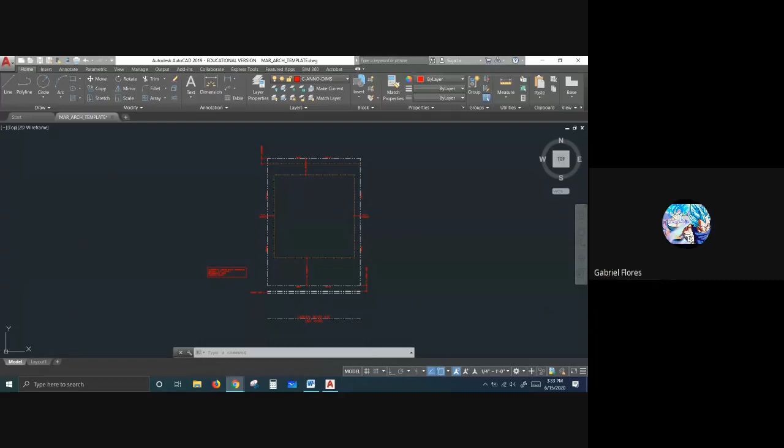Okay, so your assignment, what you were supposed to turn in yesterday, was just the site plan. Ideally it should have looked something like this. If you guys can see my screen, it should have looked something remotely to that. Obviously I'm missing my north arrow, I haven't put that in yet, but it should have something remotely close to that.

I know some of you guys were trying to put the title block already. I'll show you guys how to do that right now in a little bit.

Okay, you had a question on text sizes, that is dependent on what I'm about to show you right now. That was from my other class. Let's see. All right, that was mainly it. The other thing was scaling, where you're trying to set up your text via annotations, and it was messing with the scale. Did anyone have any questions other than that?

Did anyone have any questions on what they did, reasons why, anything? You can either say it or put it in the chat. No? Sir, is it regarding your...

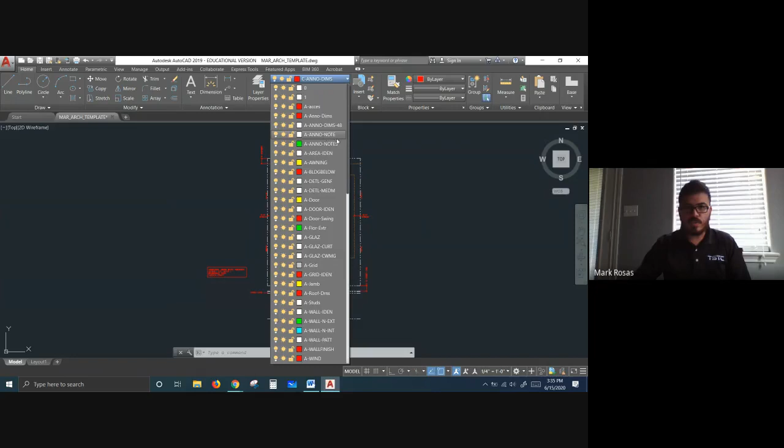When I was doing this, I used the anno dims. I do need to change my text to the actual text, I just tried keeping it to civil since it was a civil drawing. If you did it under the architectural text, that is fine as well, that's not that big of a deal. So if you used architectural anno notes, that's fine.

Yeah, I believe they're gonna just print out the same anyways, it will print out the same thickness. It's just the color that it represents on the screen.

For the assignment, also for my setback of 25, I did not edit the lines. You didn't put the lines? I did, but I did not trim it from the sides. Oh okay, so yeah, just for future, just go through and trim that out.

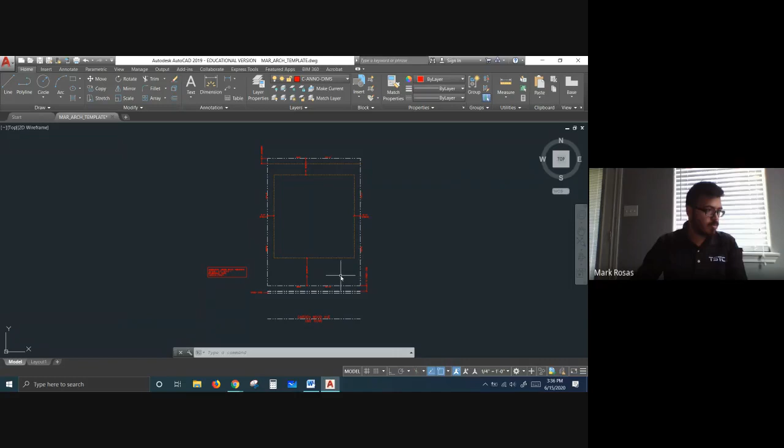Okay, that's it. All right, so the next thing, if that's all the questions, the next thing we would be going over is moving into Unit 4. So let me pull over here, Moodle, Unit 4.

Unit 4 would be actually starting our floor plan already. All right, so let me go in and pull out the PowerPoint. This is probably the most important PowerPoint in this chapter, or in this unit. And then what I'm going to do is I am going to go over...

Getting started with, well, I'm gonna go over section cuts. I'm gonna explain section cuts just so that you know, so you understand what's going on. And then I'm going to show you guys how to start drawing your house in AutoCAD.

Did you guys get the chance to start drawing in AutoCAD last semester, doing the residential, or you guys didn't get that far? We started. Yeah, we started, but we didn't get the chance to because of COVID. Yeah, we started. Our teacher was cool. She was.

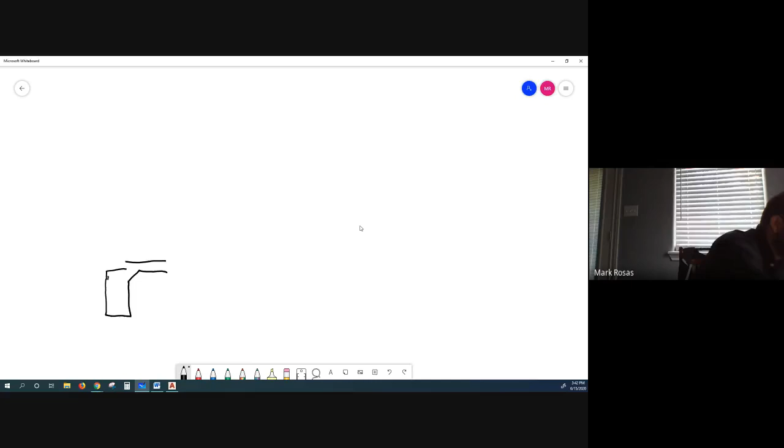So let's see - the first thing I want to cover is the exterior wall for a brick. For an exterior wall with brick, you're going to have your foundation. I'm not used to using this thing that much, so bear with me.

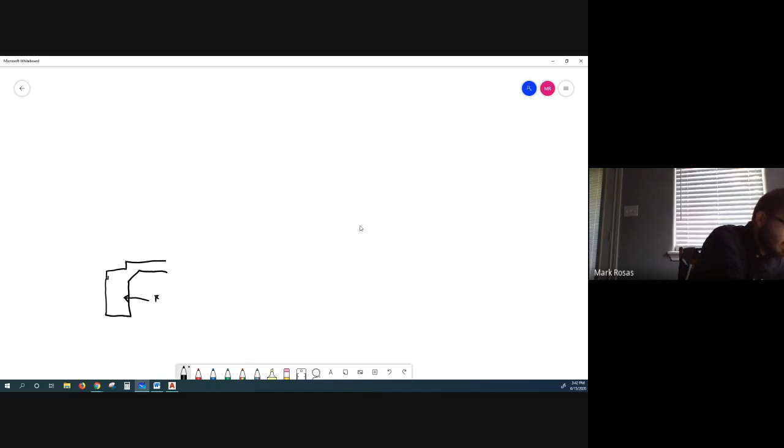So this here is going to be your foundation. I'll go over foundations in more detail when we get to the actual foundation part, but you need to know how the foundation supports the wall, so you need to see it. Whenever you start a house - if you've seen one during construction - you start with the foundation and work your way up. After the foundation has been poured...

You have your foundation and this little gap here, this little notch. This notch is going to be 1.5 inches. I'm going to pull this down with a different color so you can see it, and this is going to be 5.5 inches. Now looking at those two numbers, what does that remind you of - the 1.5 and the 5.5?

Anybody? Crickets? Is it the 2x6 and the 2x4? Yes sir, it reminds you of the 2x6. A 2x6 is actually 1.5 by 5.5.

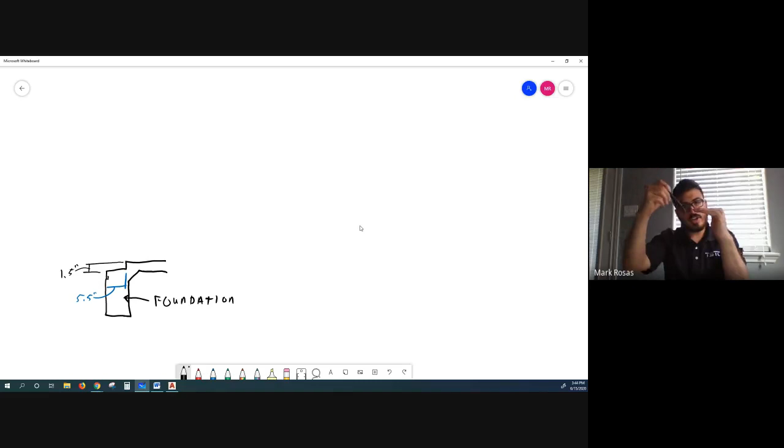So what's happening when they pour your foundation is they dig out the trenches, and at the top, when using brick, they put a 2x6 at the top, and they pour concrete in with the rebar, and it pours up and around, hopefully flush with it, so that when it's done, they knock that piece off and you have that little seat there. That seat comes into play a lot when it comes to supporting our brick, which we'll get to right now in a bit.

Now they can use a 2x4 or 2x6 depending on whatever seat they need. Brick is usually brick and CMU - you don't know what CMU is yet, we'll get into that in higher semesters with commercial work. But brick and CMU are the widest types of exterior that need to be supported.

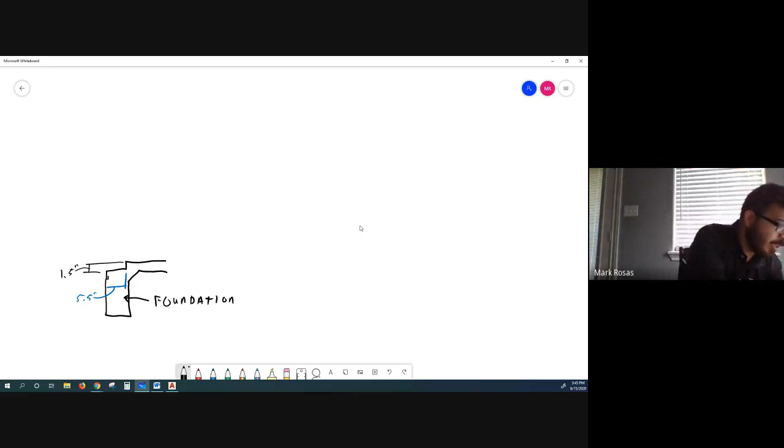Therefore you have to have a bigger brick ledge. Something like stone doesn't have that much thickness - it's fairly thin, so you don't need as big a brick ledge. In this case we're using brick for this section cut, so we have a pretty big brick ledge. Even then it's a bit skewed compared to the actual drawing because, well, it's just me and my bad handwriting. If I wanted to make it more accurate, it would be more like that. This outer dimension here is going to be 12. Let me stick to blue for my dimensions.

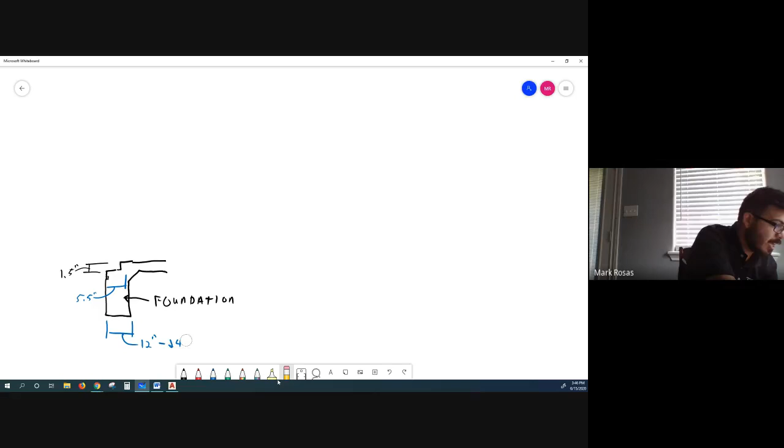This dimension is going to be typically 12 inches to 24 inches. It can be bigger, but typically it's between 12 and 24 inches. They usually try and keep it at the 6s, so 12, 18, 24. In this case, we will be using 12. But do know that they can go bigger and they can go smaller.

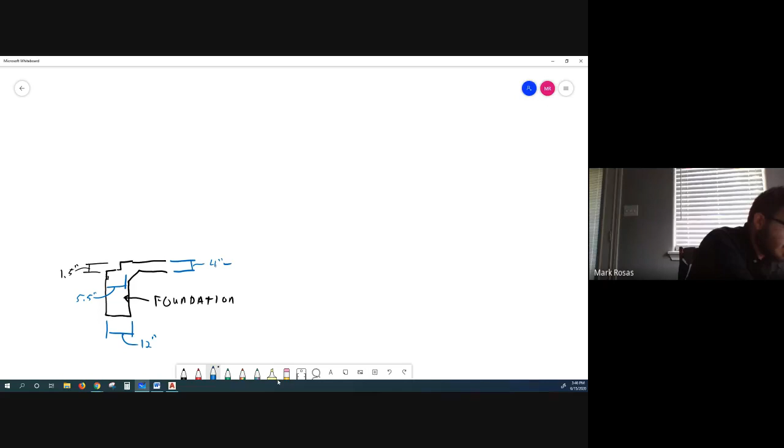This here is going to be the slab. This is the actual portion of the foundation that you put your flooring on, and that's the part you actually stand on. That can be anywhere from 4 inches to, to be honest, as thick as 8 inches, but in residential it probably never goes more than 6. So between 4 and 6 inches. And it just depends on the soil and stuff like that that you'd be building on.

So it depends on your location on Earth. Whatever type of soil, whatever type of dirt they have there, whether it's dirt, sand, a combination, clay, whatever the case may be, will dictate how thick you need to make that flooring, and also how thick you need to make this area and how thick you need to make this area. These two numbers depend heavily on your soil and how much the structure you're putting on it weighs.

So once we got that, what's the next thing that would go up after your foundation? Usually after they pour your concrete, what's the next thing that they start putting up?

So the next thing they will start putting up would be your walls, or your 2x. So what they're going to do is they're going to start with what's called a sill plate.

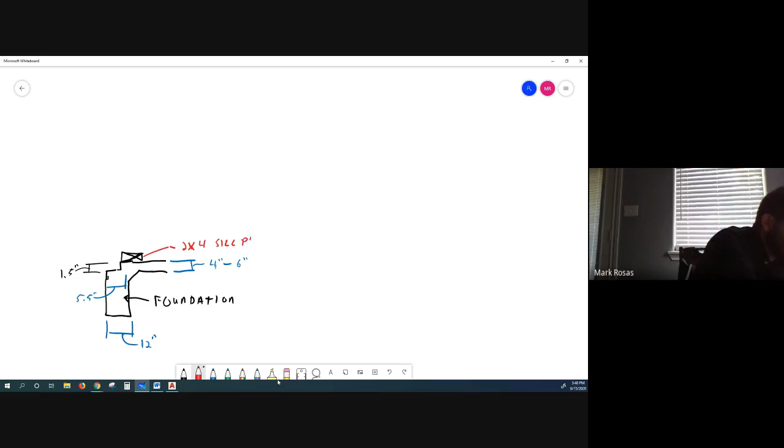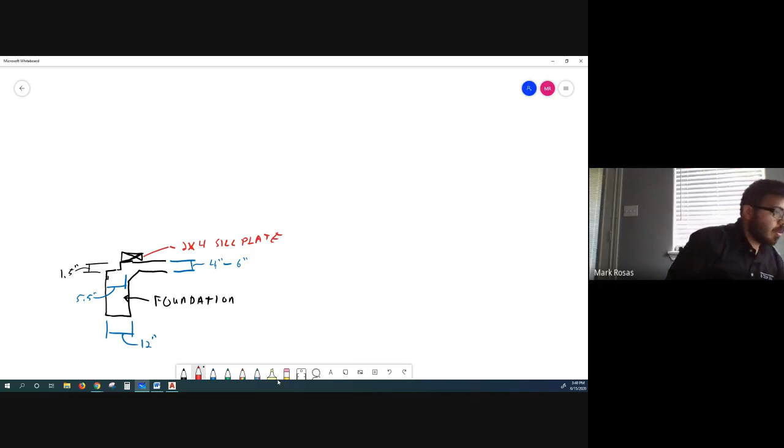This sill plate here is going to be a 2x4. In this case, it's going to be a regular wall. 2x4 sill plate. It's kind of hard to write vertically on this thing. So it's a 2x4 sill plate, and that's going to be at the very base. Now this thing is being anchored down, but I'm not going to draw the anchor just to keep it kind of clear. We'll show the anchor when we actually go into the foundation side in the future. Right now, we'll just leave the 2x4 sill plate.

After the sill plate, we go up with our 2x4 stud. So here we're going to have a 2x4 wood stud. And this wood stud is going to be basically the main part of your wall. That's going to be the actual wall that you use to attach your sheetrock to, and to attach things like pictures and all that stuff. That's the wood you're looking for when you're nailing stuff to hang onto your walls. The 2x4 wood stud.

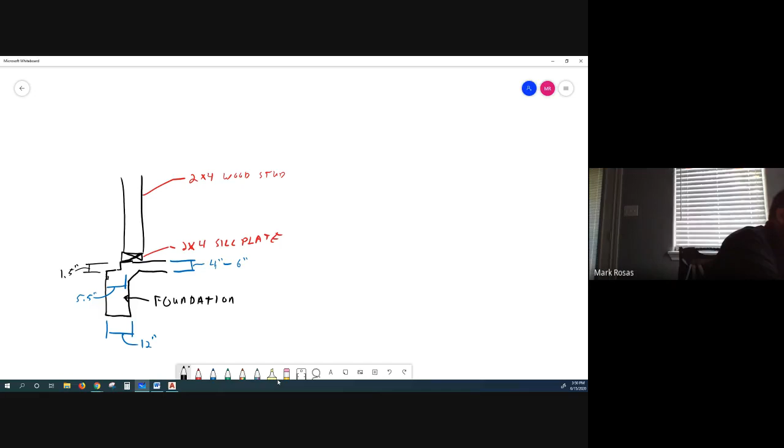So we have our 2x4 wood stud. And then every once in a while, depending on the actual room, you'll have what's known as blocking. So this were to continue up, we have a 2x4 blocking. Now what this blocking is basically doing is it's essentially acting as a horizontal support.

If you think about it, the best way to put it is: if you had a pole standing, if you had 2 poles standing, and someone came, the wind came, or someone came and pushed it this way, they're going to topple over, correct? 90% of the time, or 100% of the time, yes. So what that blocking is doing is you're putting a horizontal piece connecting them, nailing this together, so that when the wind comes to hit it, or when something comes to hit it, it's braced and they're supporting each other. So it's going to be a lot harder to knock it down. That's probably the easiest way to explain what's going on here.

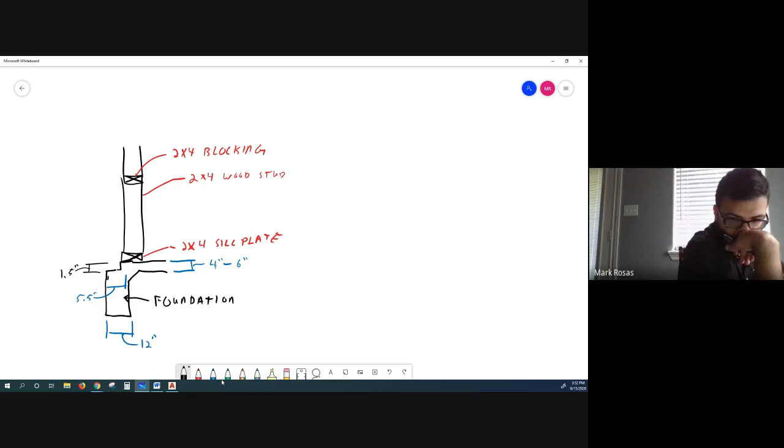So we have our sill plate, we have our 2x wood stud, we have our 2x blocking. After our blocking, we're going to have some additional things on here. Have you guys ever seen construction going on? Does anyone have any construction experience? Does anyone know what would go on after your 2x? Would we work on the outside or would we work on the inside? What would be common sense? Double.

That sounds more like a question than it does an answer. I know, I'm not so sure. I would feel like the outside because you want to be able to make sure your wood... make sure you get it right.

You guys are correct. So once they put up the 2x studs, typically what's going to happen is they're going to start working on the outside to protect the wood that they put up. They don't want it raining and messing up the wood. So what happens is they go in, put up the wood studs, and frame out the roof.

Obviously during construction they frame out the roof, then they put up the exterior. Once they finish the exterior, that's when they go inside and start putting in wiring, insulation, and sheetrock. Because imagine if you put that stuff up without doing the outside first and then it rained - it defeats the purpose. You'd have to go back and do it all over again. So it makes sense you do the outside first and then the inside.

So with that being said, we are going to have a little thin piece right here. I'm gonna point to this with the red. All right, right there - this one goes there, there, and there. So that piece is going to be a 1/2 inch continuous membrane.

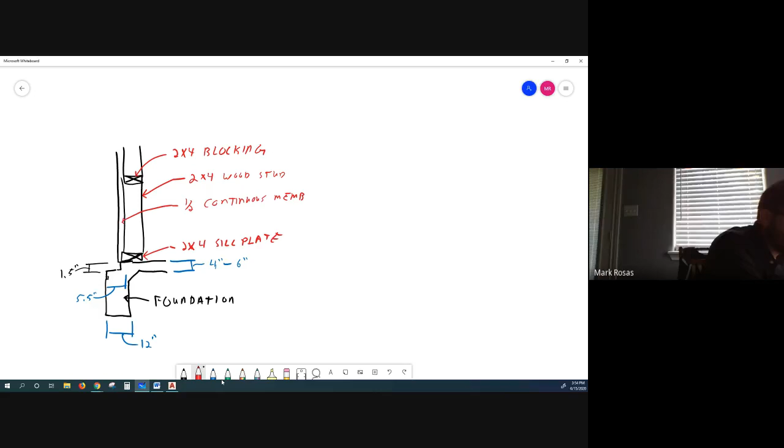Now I'm second guessing my spelling. You're good, that's right. No, yeah, I think it's right. Once again guys, not the best speller in the world - I didn't go to class to be an English teacher.

So we have a 1/2 inch continuous membrane. Now, actually, it's not a membrane - that's why I was second guessing myself. It's a 1/2 inch continuous sheathing.

So what's going on is after you've put up your wood studs, they're going to put up plywood or some type of board. Typically in these cases, it'll be a 1/2 inch plywood or a 1/4 inch or 3/8 plywood going across. Then on top of that, they're going to nail in that membrane. The 1/2 inch plywood going across is just to have a better nailing pattern for when they put that continuous membrane, and that membrane is basically a vapor barrier.

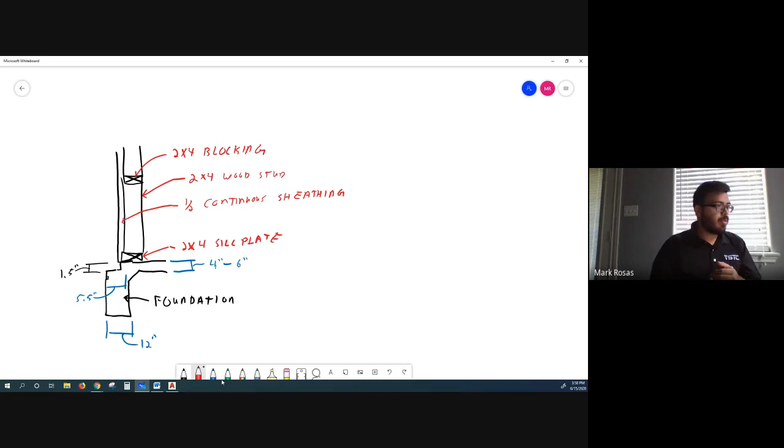Don't get me wrong, it's not a lot of water, but if you have water running down, this membrane protects the wood from absorbing the water. Because after years of absorbing that water, your wood will eventually go bad and rot. So that is why they put that membrane there.

So in reality, there would be a really thin line there, but it wouldn't be visible, so I'm just gonna try and draw over it or next to it in green. And that green there - let's see if I can point to it with the red - the thickness varies depending on the construction people. Typically, I don't put a specific size; I leave that to the construction person.

But the smallest you can probably go is going to be a 6 mil polyurethane - as you guys can see, I don't use this thing that much - a 6 mil polyurethane vapor barrier.

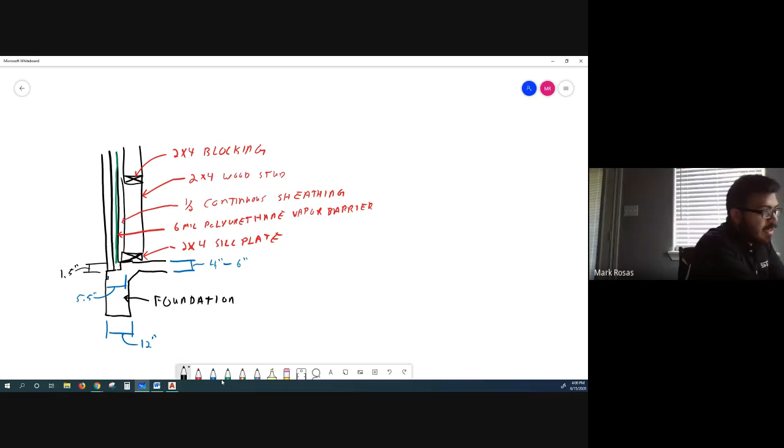This brick can be anywhere between about 2 inches to about 4 inches. It really just depends. But the overall thickness of this wall would be what distance? Can anyone figure that out?

While you guys are trying to figure that out, I'm gonna come in and put in some squigglies, and these squigglies are gonna represent my insulation. Let's go R19.

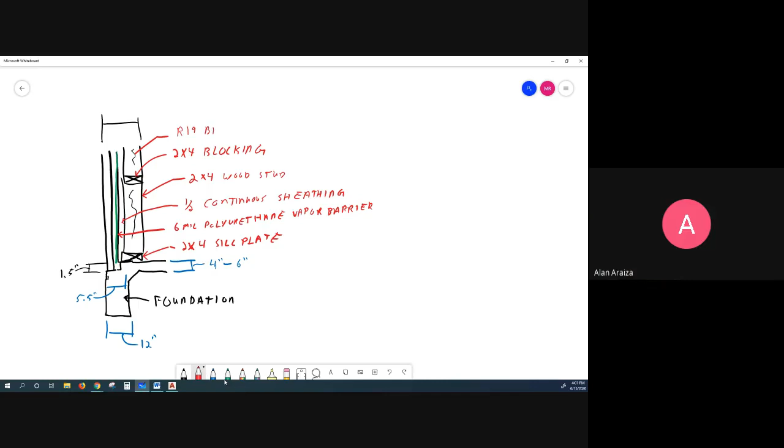So, is this wall for brick? Yes, it's for brick. So in total, it's gonna be like 8 or 9 inches. It'll be more than both.

So if you remember, you have your 5.5 inch right here. Inside this 5.5 inch, you have your brick, a half inch air gap for the water to run down. And if for whatever reason the water does fall off, it hits that membrane and this plywood that are also inside this 5.5 inch. So you have 5.5 inch plus whatever thickness of this 2x4.

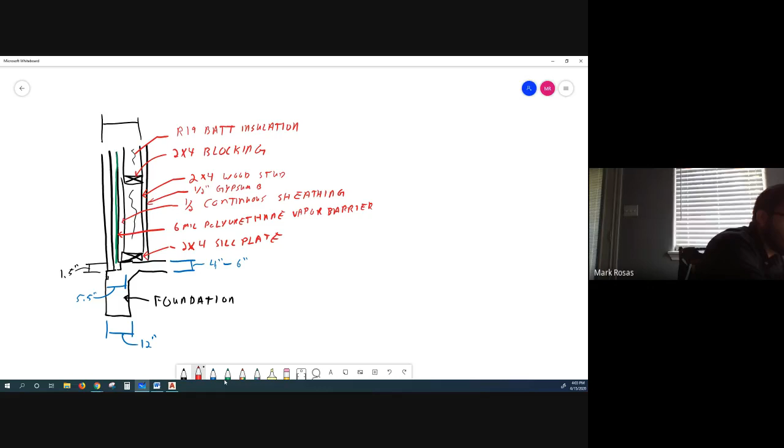So what's the thickness of my 2x4? 3.5. The thickness of this 2x4 is 3.5, yes. And then this last piece that I'm adding is going to be half inch gypsum board, otherwise known as your sheetrock.

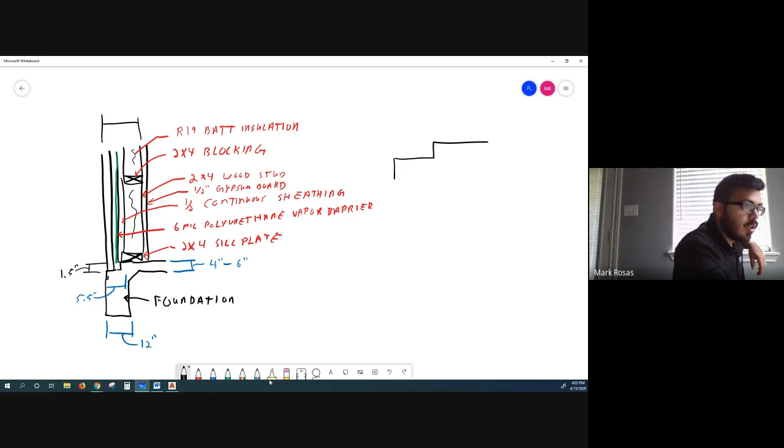So you have 5.5 plus 3.5. What's that already? So I have right here a five and a half, a 3.5, and a 0.5. What is that overall distance? It'll be 9.5.

All right. Does that make sense? Is there anybody that's lost here?

And the reason I bring this up and the reason I draw this, because the most important part is going to be this line, and that line. These 2 lines that I highlighted in yellow are going to be the most imperative parts when it comes to drawing your floor plan along the exterior.

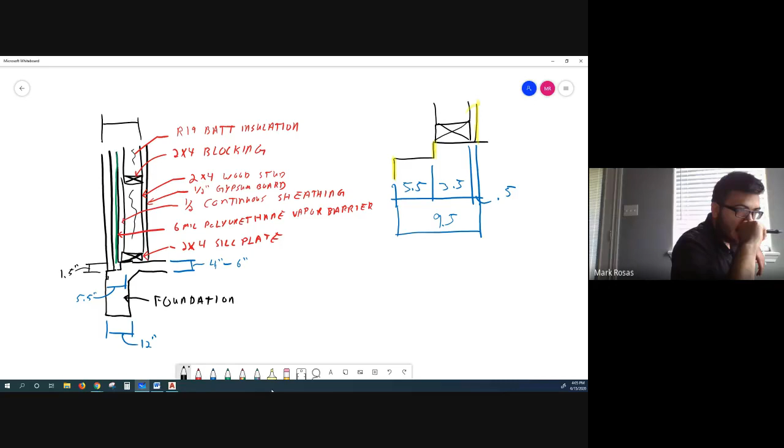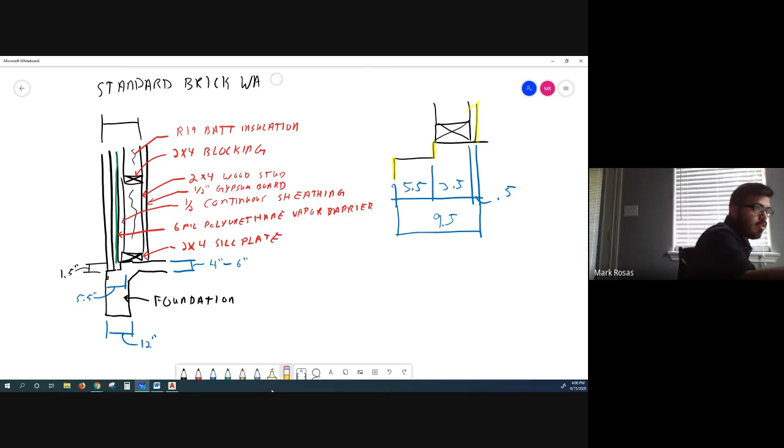Now, if a regular standard wall, this is a standard brick wall, what would my plumbing wall thickness be? It's like 6 inches. 6.5. You guys aren't listening, you guys aren't even letting me finish. What's my brick plumbing wall gonna be?

So my question to you is, if a standard brick, what's the difference? First question, what is the difference between, let's just talk regular wood. We talked about this last time. What is the difference between a plumbing wall and a standard wall? Doesn't matter if it's brick or exterior. For the plumbing wall, we use the thickness. What's the thickness for a regular wall? The thickness is 3.5, plus the sheeting.

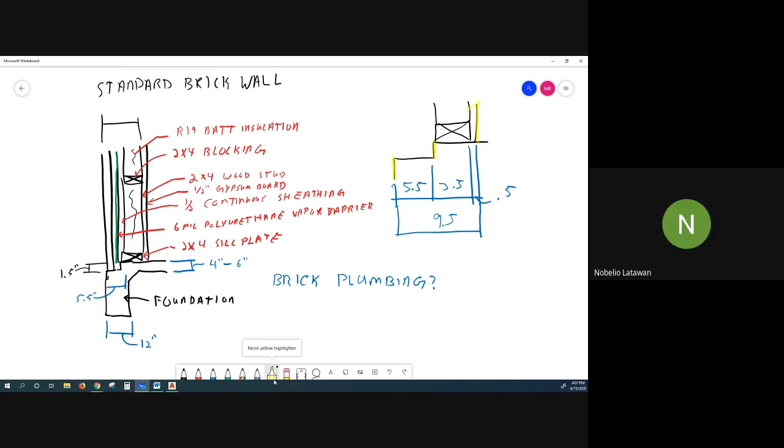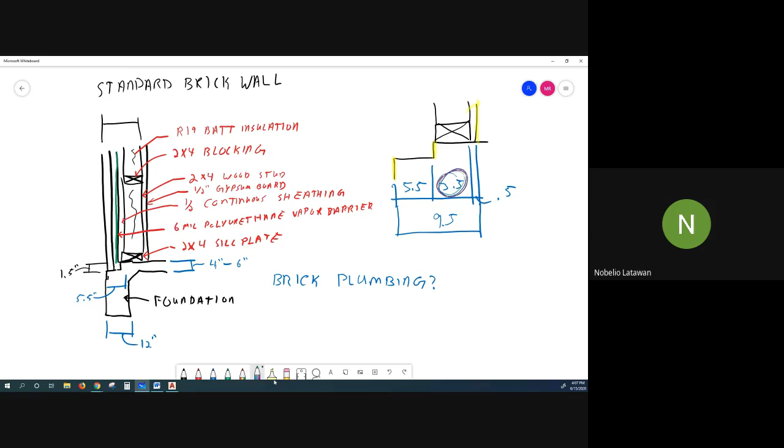Well, just talking about the stud by itself, just the regular 2x4, it's a 3.5. So the regular stud is going to be 3.5, right? What is the plumbing stud? It's 2x6, so it's 5.5.

So my question to you is, if this area here is a regular standard wall, if I wanted to make this standard wall into a plumbing wall, instead of a standard brick into a plumbing brick, what would my thickness be? And what is changing? It's 11.5.

Does anyone see where we're getting 11.5 from? Does anyone not see where we're getting 11.5 from? All we did was swap these two numbers. Instead of a 3.5, we put a 5.5. That raise in 2 inches causes this to raise 2 inches. Does that make sense? Is there anyone that does not understand? Because this is going to be very important for getting started on your floor plans. I'll take your silence as everybody understands.

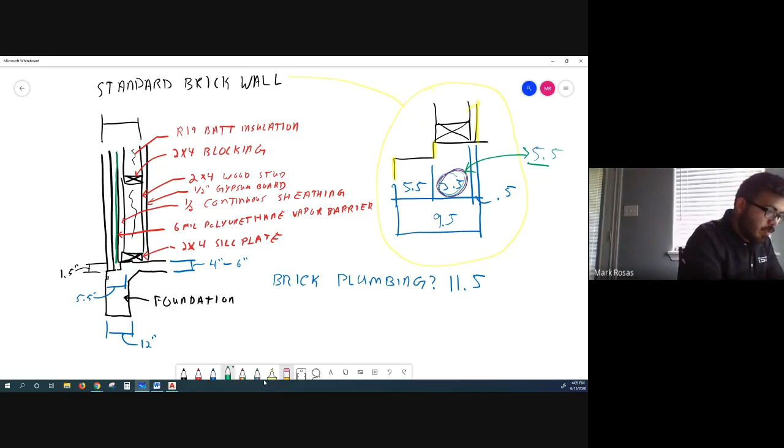I wish I had an undo button.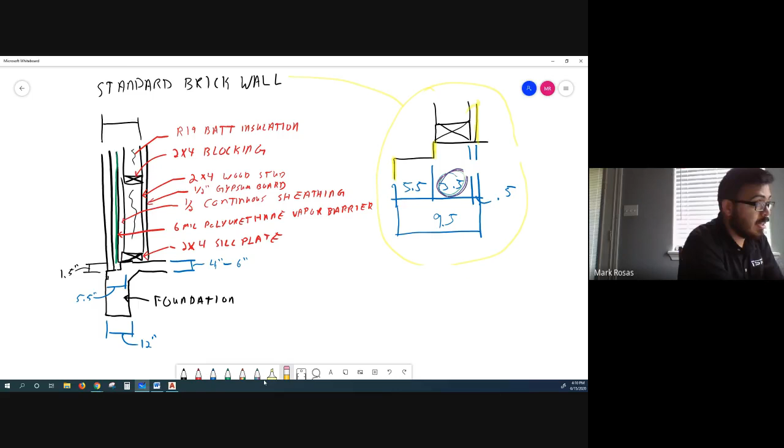If there's no questions on the standard wall, then there's no questions on the plumbing brick wall. So on the plumbing and standard brick walls, you guys are good.

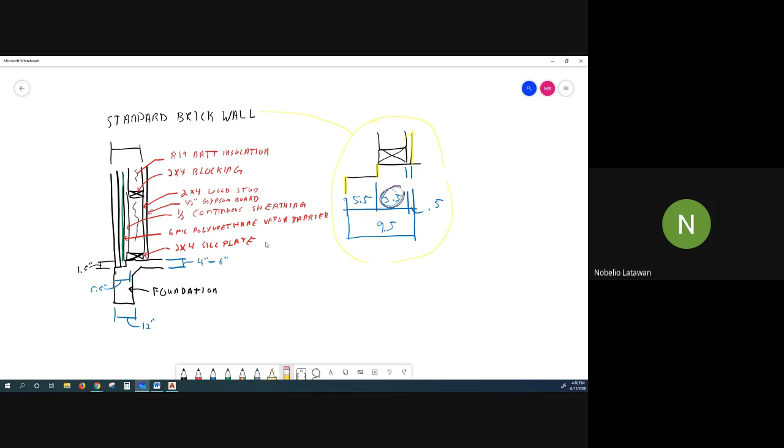So what I want to do now is... I just have a clarification regarding the plumbing. If we're going to do the siding of the bathrooms, are we going to do the whole portions of the bathrooms to be 11.5 thickness, or just the portion where the plumbing goes through? Just the portion. Well, it depends. It depends on how your wall is set up.

There's different scenarios, and we'll go over those scenarios when we get to the actual CAD part. It honestly depends, because it depends on if there's any other walls that are interacting with that wall. I'll show you what I mean when we get to the AutoCAD.

I just realized we're already running out of time, so I'm going to get one more section here. That one's going to kind of get sped up because we've already gone over the majority of this, but we'll go over that right now when we get to the AutoCAD part. Typically, you're only going to have it where you have your plumbing, wherever you have stuff like that. But like I said, it depends on how your walls are set up, and I'll show you what I mean when we get to AutoCAD. Okay?

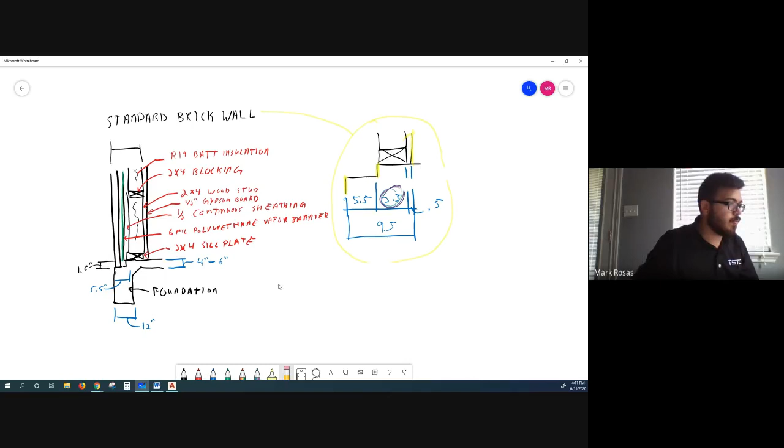Copy. All right, so now for this one, I'm going to do another foundation.

Now, if you notice, this one does not have a brick ledge. This one is going to be for both stone, glue-on stone, stucco, or siding. Will be all very similar.

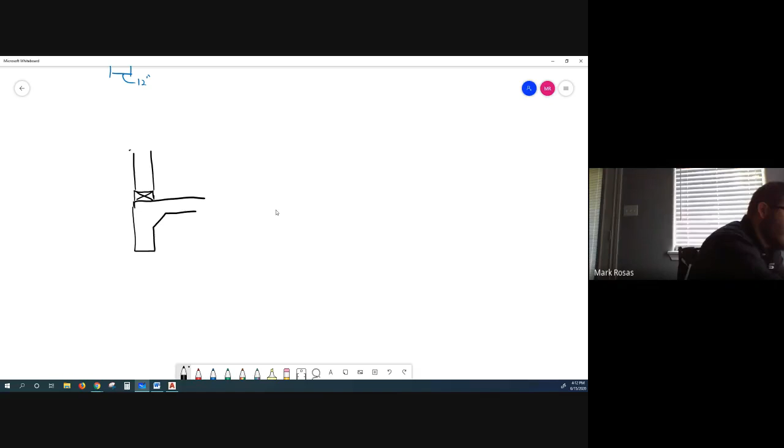So we have our foundation. Once we have our foundation, we have our sill plate. Then we have our wood stud. Once again, I'm not going to go too far into detail on this side. I'm not going to label everything because it's basically the same labeling on top. You have your sill plate, you have your stud. Now, if we're doing stucco here, we're going to have...

Oh man, can I undo that? Control Z. Oh, it does work. So we're going to have a slight overhang. Oh, what did I just do? That's cool. Either way...

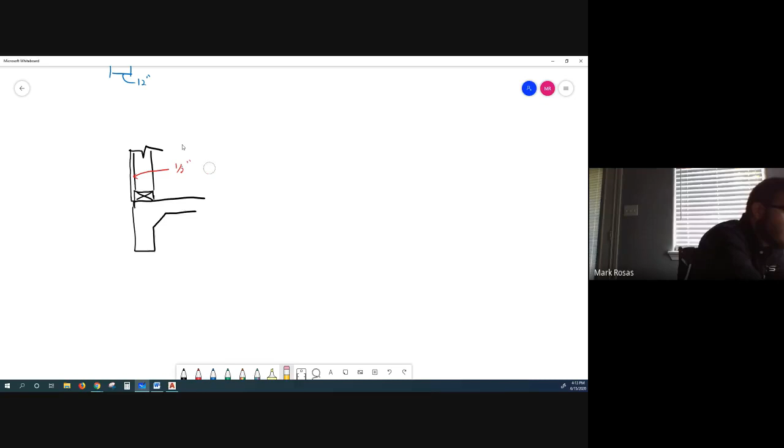This piece here is going to be a 1/2 inch continuous sheathing. So that sheathing, once again, it could be plywood, it could be hardy board, it could be whatever material the contractor wants to use. You just say, hey, it needs to be 1/2 inch thick.

And then on top of that, we're going to have, in this case, our stucco. If you notice, our stucco right here overhangs our foundation. And this stucco, we'll say, is 1 inch.

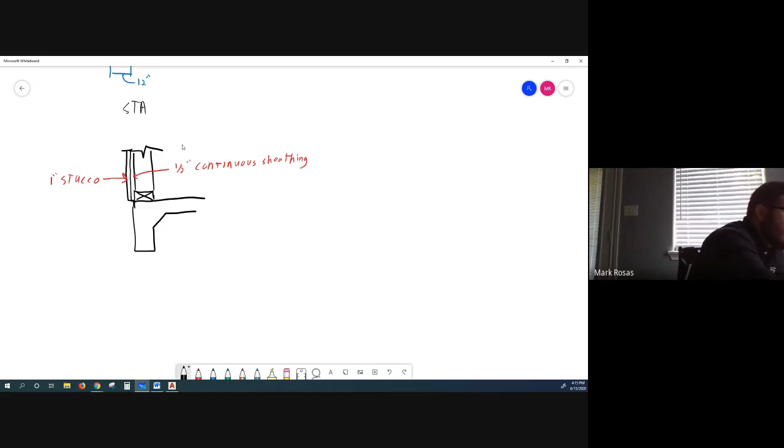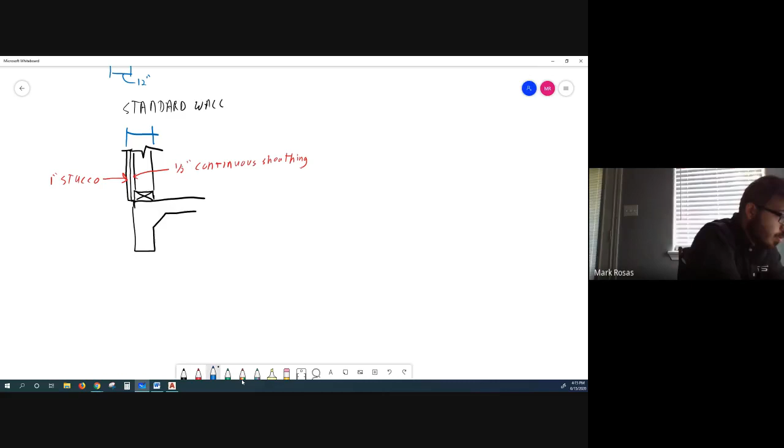So if this is a regular standard stucco wall, so this is a standard wall for stucco, what is this thickness? Looking at the numbers we have here. I forgot my...

1/2 inch plywood, my 1/2 inch gyp board. Anybody? Board. Me. 5.5. Yes, it would be 5.5. We have our 3.5 plus 1 is 4.5, half plus half is 5.5. So for a standard stucco wall, it is 5.5 inches thick.

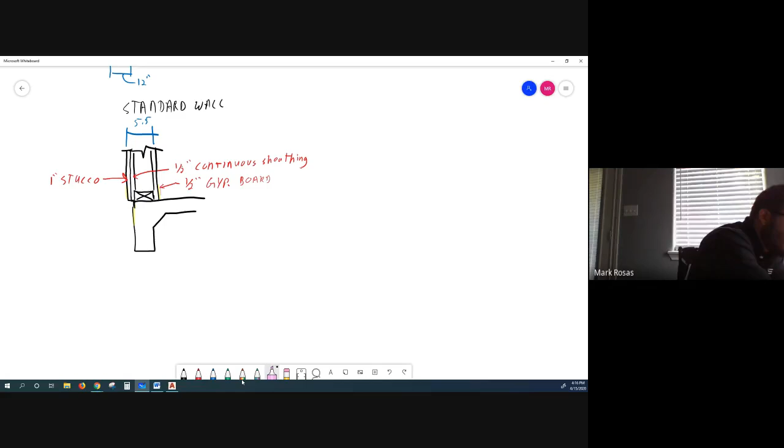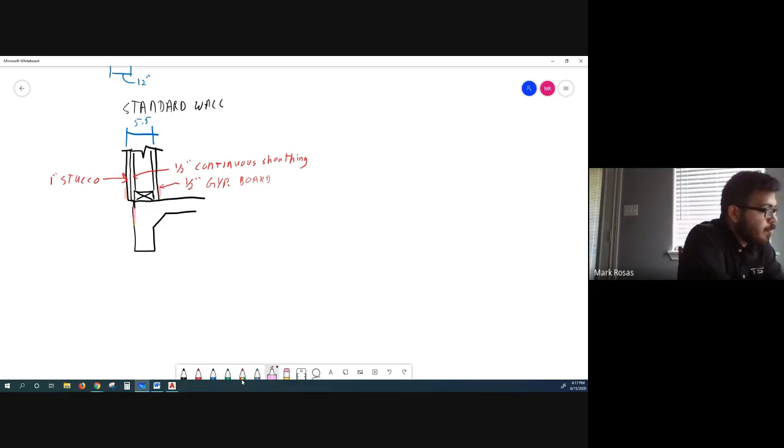And the important parts are going to be this wall, this line, and this line. Can I change this color? Yes, I can. Look at that. So this one, and this one are going to be your most important lines. You see how your most important lines shifted?

Here, it was edge of foundation, edge of ledge, and inner part of the wall. Now it's inner part of the wall, edge of foundation, and the exterior part of the wall. It depends on which type of wall you're designing, you're going to have different styles you're going to need. Does that make sense?

Yes. All right, so if a standard wall is 5.5, how much is my plumbing? My plumbing stucco, in this case, this wall here that we just drew, but for plumbing. About 7.5, it would be 7.5. Once again, just like in this one, all you're doing is adding 2 inches because you're making the wood stud 2 inches bigger. Does that make sense? Yes. All right.

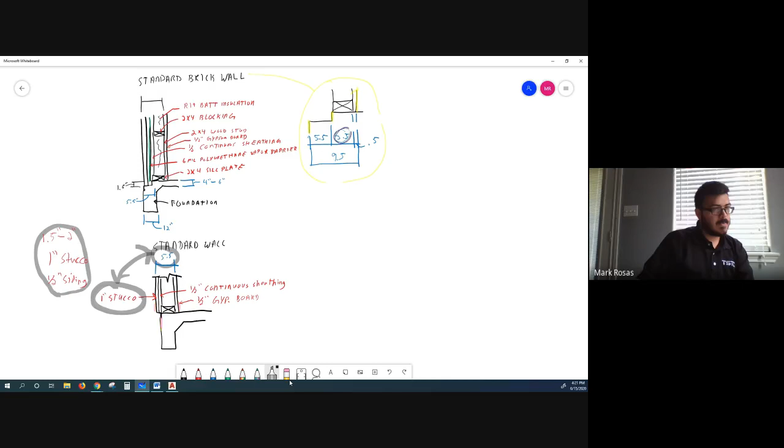All right, does that make sense? Before I move any further, before I move into the interior walls, is there anyone that does not get what we just went over? All right, I'm gonna take your silence as a yes. Hold on, okay, on the plumbing you guys said it was 7.5, right? Yes. How did you get the 7.5? Because I'm doing it myself, but I keep getting 7, not 7.5.

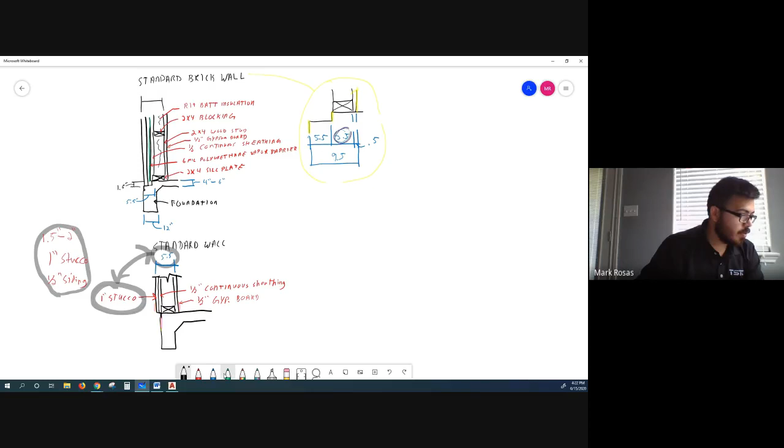Okay, so if you have this piece, we have 1 inch of stucco, right? We have 1/2 inch of the plywood or sheathing, so that's this number. We have 1/2 inch of gypboard, and then I'm gonna do this one first just to verify that number is correct. Then we have 3.5 of stud, right? We have half, that one, that one, that one.

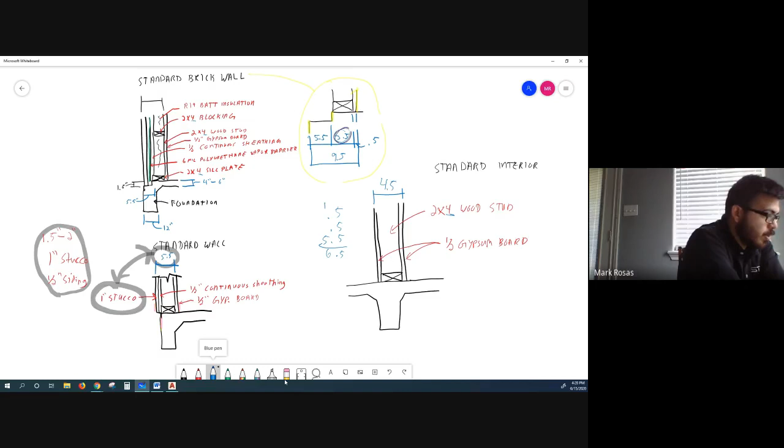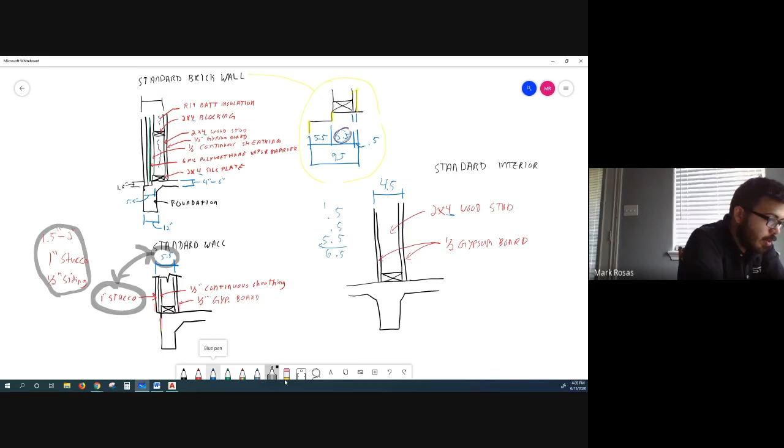All right, on these walls, the most important part to remember is going to be the actual sheet. All right, does anyone have any questions on this? I tried to break it down as simple as possible.

No? Nah, all right, yes, slowly go. Wait, do you have questions, or not? No, I don't have questions.

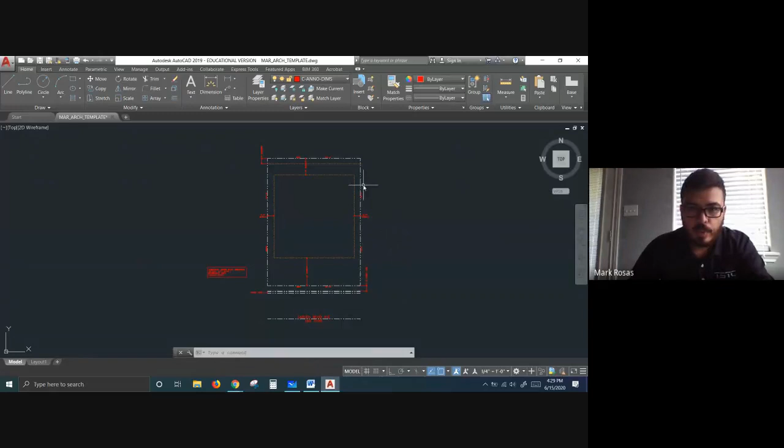Like I said last time, we have our floor plan and our site plan because we needed to know these boundaries. These boundaries limit the size, the amount of space we can use - how far side to side and how far front to back we can go. However you design your house, whether it's an L shape, U shape, C shape, J shape, K shape, square, rectangle, triangle, whatever shape you make, it doesn't matter as long as it fits inside this rectangle. Just know whatever odd shapes you make, you'll suffer the consequences when you get to your roof. Just fair warning.

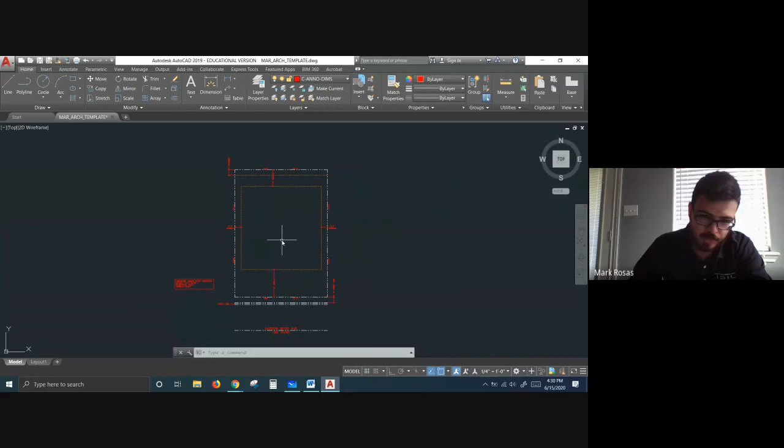With that being said, I'm going to use this as my guide to make my floor plan. First I'm going to copy this box out - it has to be drawn correctly. I'll copy it out and use this to draw my house, that way I know wherever I move this, it'll stick together. I joined it. So here I know I want to design a house, and I'm just going to start making up some sizes real quick.

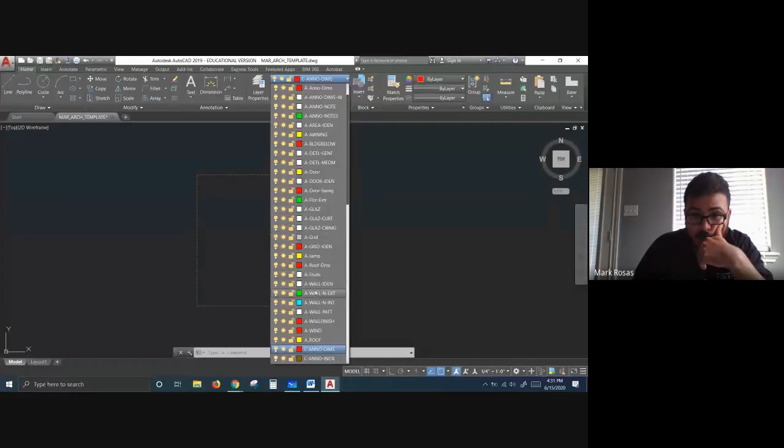Let me switch to my architectural layers so I can get started. Let's see, we have our wall exterior line. I'm going to draw a line here and here, starting from the left, from this corner, and use those two lines to make the rest of everything else. So I'm going to make the front of my house.

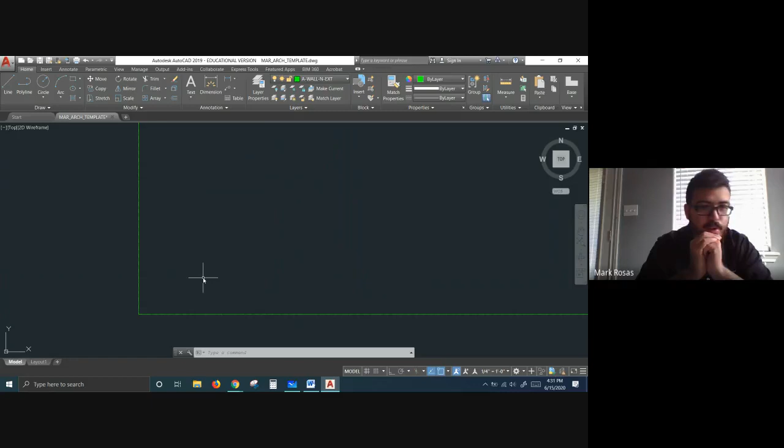Somebody give me an exterior type. Brick? All right, I'll make the front of my house brick. Never mind, cedar? You say cedar? Yeah, cedar, so wood siding. No, pine - it's a siding. Point is, it's a siding. All right, so I'm going to do a... all right, so on the sidings.

Okay, so I will do my front siding, but I'm going to start on the side, and that side will be brick - I'm choosing that side first on purpose because there's going to be some different scenarios that pop up. So I'll start with brick on my side, then do the front as siding. So I'm going to offset my brick.

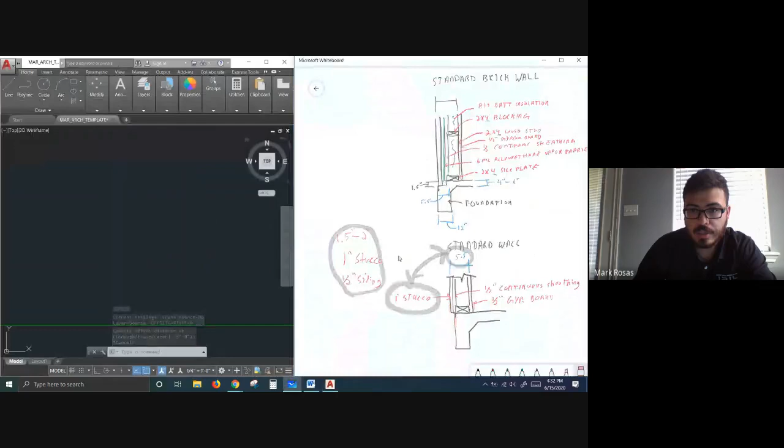Remember on that other drawing, let me see if I can pull that this way. Let's see, go here, pull in this one, do kind of a side by side. No, what am I doing? All right, this is what I want to look at right here. Give me some more space here.

All right, so if you remember, we have that 5.5. You guys are still there, right? I didn't close the window. Maybe - all right, no, the window minimized on my side, so it's like, oh, I lost them all. All right, so if you remember, these three lines highlighted in yellow are the most important lines right here.

So I'm going to start with this exterior since I'm starting on the outside. I'm going to offset 5.5 first - 5.5 inches. All right, doesn't look relatively small. And then I'm going to offset, so now I have these two lines.

From this line to this line is going to be how thick? From this yellow line to this yellow line, from this... 4, right? I'm going to offset 4. All right, so this is my exterior wall on this side.

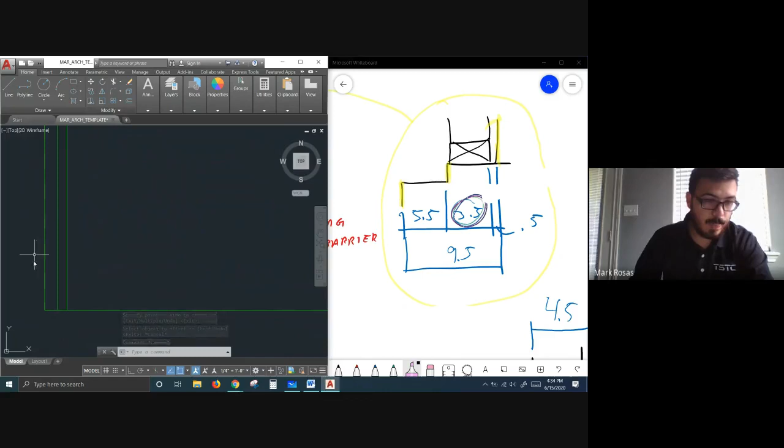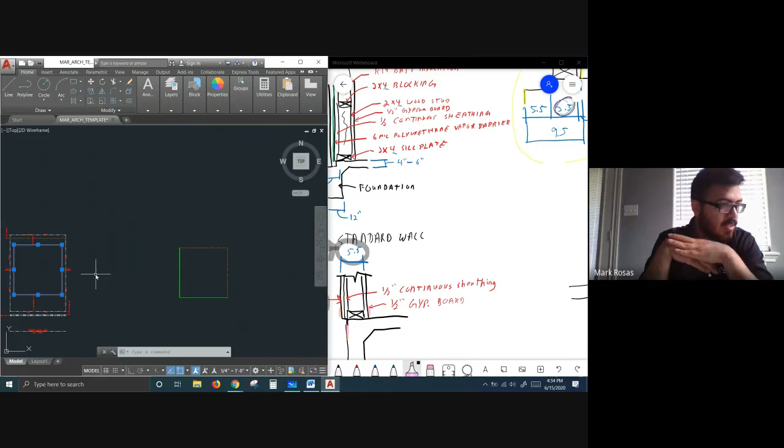Now that we have that, I'm going to come over here - notice the difference. I don't know if you noticed, but on this one, remember I told you guys this box is the limit you can build your house. Now that's true in a sense, but what's more important is that's the limit of your foundation. Your foundation cannot pass that line - foundation being this line here and this line here.

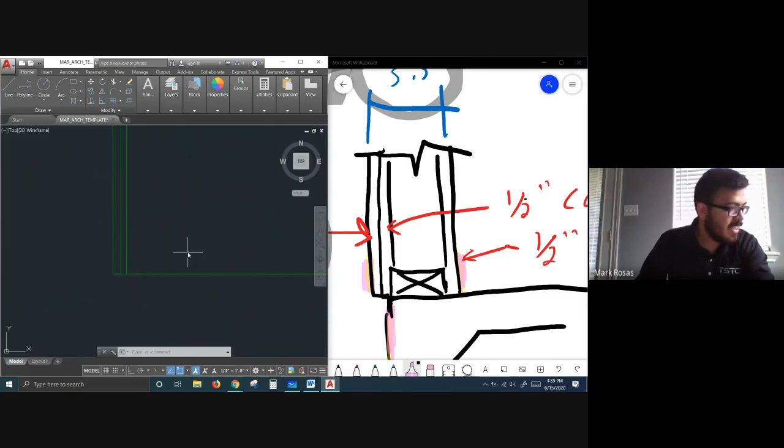Now if you notice here, our stucco, siding, and all that go past the foundation, right? Yes, I want verification before I move forward. Yes, yes, don't scream at me. All right, so...

Because of that, this line here - let me see if it lets me do it with my mouse. No, it does not. So this line here is going to be this line right here. So I have 1 inch. Well, I'm going to do wood siding, right? So wood siding, we said 1/2 inch, so 1/2 inch plus 1/2 inch is going to be 1. All right, nobody's lost on that, right?

We're going to offset 1 inch forward, and then I'm going to offset my 3.5 plus 1/2, so I'm going to offset 4 inches. Where these two lines meet is going to be my wood studs and my sheetrock. And then this is where my brick stops and my siding overpowers it.

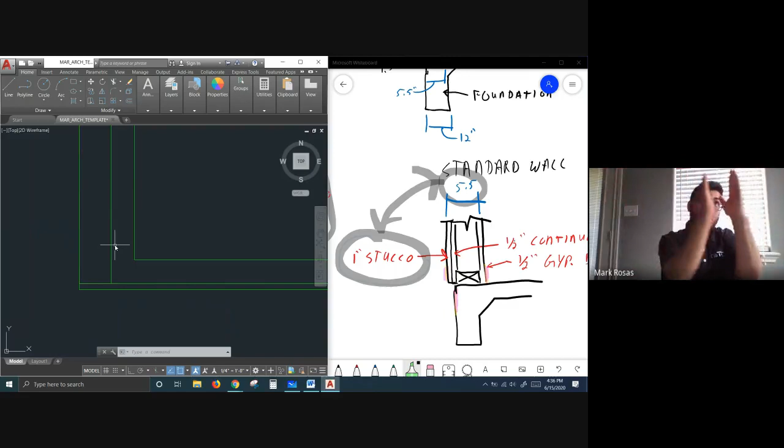Does that make sense? Because if not, you'll have a situation where your brick's still visible and then your wood stops at it, and you'll have all wood and a little sliver of brick. You don't want that. You want the brick to be behind the wood, right? Yes? Yep. Alright.

So this is the beginnings of my house. Now let's say I want this to be a garage. I know by common sense that a decent sized 2-car garage would be, let's go 20 feet this way, and let's go 22 feet back. That's a very big garage.

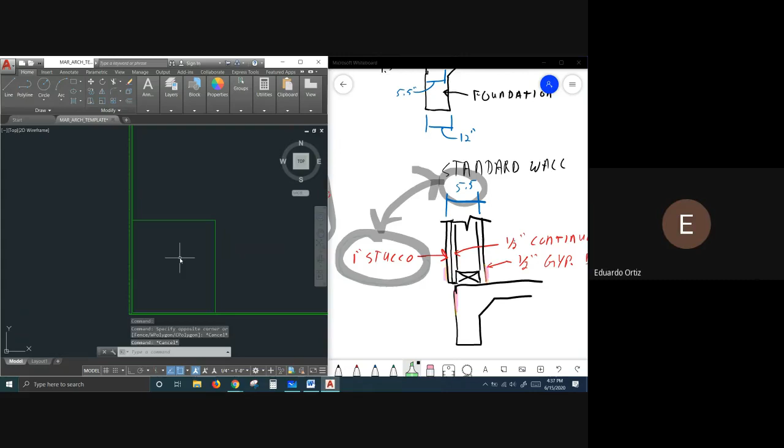Alright, where these two lines meet, this is the inside of my sheetrock. This would be the inside of my room. My truck wouldn't fit in there, Mark. Well, you can park it outside.

Alright, so we have an interior wall. So my question to you, once we have our garage, what do we want to put behind the garage? Do we want to put a bedroom? A kitchen? Talk to me, what do we want to put there? Laundry. So a utility room. Alright, a utility room.

A utility room typically is about 6x6, depending on the size. So I'm gonna do a regular wall, offset it here. It's gonna be a regular interior wall of 4.5. We got that number from right here, 4.5. And then I'm going to offset, let's go 6 feet. I'll have my laundry and stuff back here.

I'm gonna offset another, and then here. So I might have some plumbing coming through this wall, correct? So this is that situation you were talking about, Nobelio. This is a laundry room. I'm gonna trim this wall here, and what I'm gonna do instead is offset 6 inches instead of 4. So this wall is a little bit thicker because I might have some plumbing lines there.

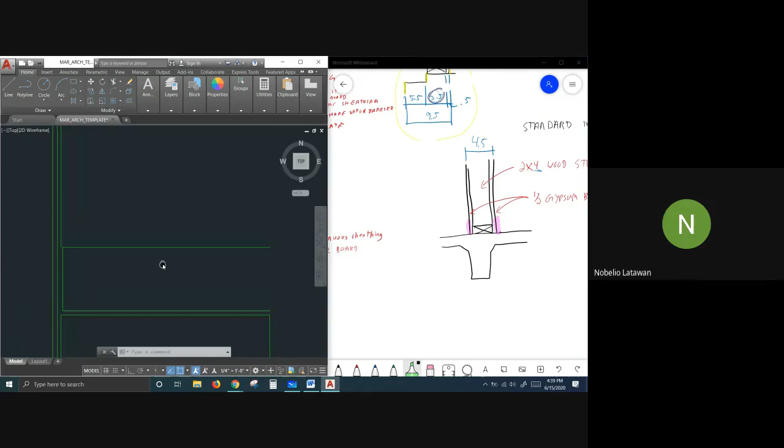Alright. And then I'm gonna offset 4.5 again, offset 4.5 again, and the wall goes back to normal. So the wall comes in, the wood gets thicker, keeps going, and then once that room finishes, it goes back thinner. But because it stops and starts within the same room.

Now let's say this is, we're gonna make this big. Let's go 8 feet. Alright, offset 4.5. And then we're gonna trim off these little connections here. For right now, it's gonna end like this. Alright, what do we wanna put right here?

This would obviously have to be a hallway of some sorts. What do we want to put right here? A kitchen, a bedroom? Kitchen? Okay, so we're going to do kitchen. Let's do a big kitchen. Well, not a big kitchen, let's do a decent sized kitchen.

Let's go 15 feet up, and let's line it up with the garage. So let's see, this was what? That was 20, so we're gonna offset 20. So we're gonna go here, here, alright? This wall needs to keep coming out, so I'm gonna offset it 4.5, 4.5. And I haven't even started figuring out if this is gonna be open floor plan or closed floor plan.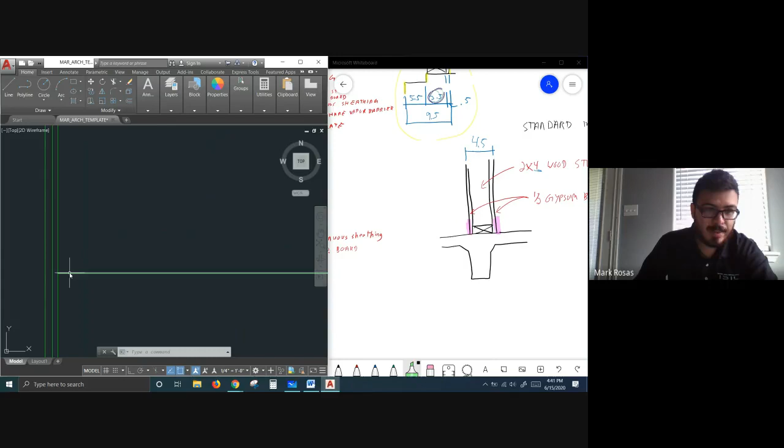Brick again. Alright, so now that I'm on the inside, I gotta work my brick out. So I'm gonna go by 4. Remember where I'm getting that 4 from. People always get this number and these numbers confused. This is the 3.5 and the 5 and the 0.5, and then my 9.5.

So that gets cut there, that gets cut there, and that gets cut there. Alright, so that's the start of my house. I started it already. I'm gonna start working my way this way. I'm gonna turn this corner right here. So I'm gonna go offset 4, and then offset 1.

That's gonna close right there. So this is gonna turn back, and then right here, about halfway, I'm gonna start drawing. I like to extend it all the way just so I know that it goes all the way. And here will be my entry.

All right, so I'm gonna do an entry. We said we wanted to do wood along the front, so I'm gonna offset 1 again. Let me go ahead and connect these, and then offset my 4.

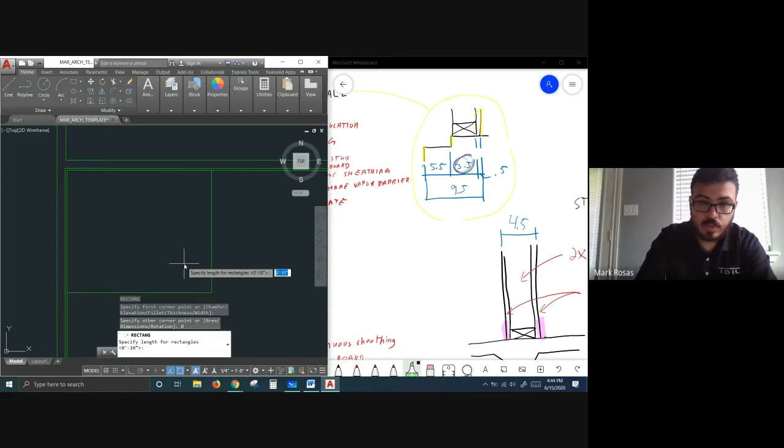So there's gonna be no walls on this corner. And then I'm gonna do a column. Let's do, columns look good. The smallest you can go in a column, I wouldn't go smaller than a 10 by 10 or smaller than an 8 by 8. But I like to do 12 by 12s, me personally, so I'm gonna have a little column there. All right.

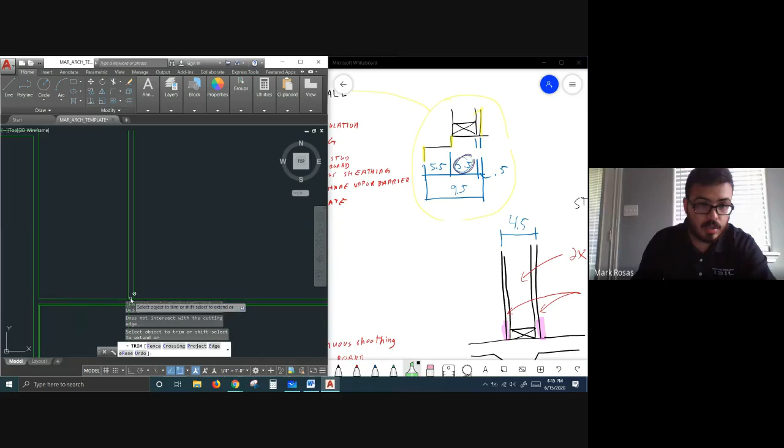Here I have my foyer. So I need to offset the same thickness as my interior. So I'm gonna go, let's go 6 feet, just so it kind of lines up here. I'm gonna do a regular wall, only because I already know my kitchen's over there. Let me trim this out. I don't think I need that section anymore, so I can trim that little piece out.

And then I'm gonna offset up 6 feet. I'm gonna make this 6 by 6. And right now I'm just making up numbers just to, all right, so this will go here, here, trim that there.

And you can see how my house is starting to get put together slowly but surely. All right, this can be a dining room and a living room, one big area. I can probably say, you know what, I'm gonna go 15 feet this way. And I'm gonna run this up all the way up to this corner. All right, so this is gonna be like a living room, dining room area, one big rec room.

Once again, right here, I'm just showing you guys the design side. I'm not really sticking to the 25,000. I'm just drawing just so you guys can see it by being pieced together. But I can imagine all of this being maybe the living room or the family room where guests are gonna hang out, and then this will be a big dining room, or vice versa. You know, there's different scenarios you can set up.

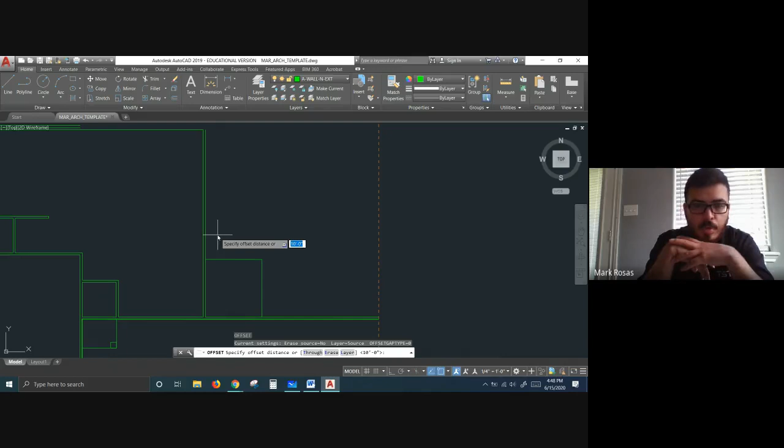From here, what we can do is I need a hallway. For hallways, you usually don't want to go more than 5 feet. 4 foot, 3 feet is probably the smallest you'll want to go. 4 foot is pretty good. That allows for a person to walk in sideways and someone in a wheelchair. 5 feet allows for a wheelchair and someone to walk normally. But I recommend not going more than 4 feet. Don't go more than 5 feet for sure, but try to stick to 4 feet. Mainly because you create a big waste of space when it comes to square footage if you make really, really big hallways.

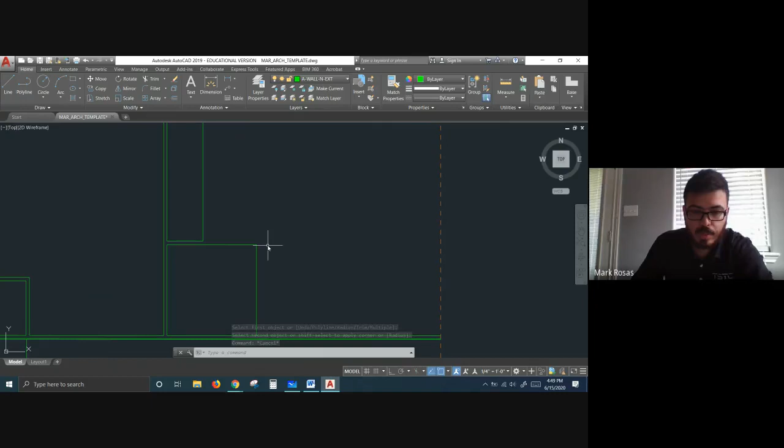All right, and then houses, square footage is important. All right, so I can cut this one up here. This will be the beginnings of a hallway. I can do 4.5 this way, and check this out.

I'm gonna do 6 feet offset. Oh, that's big. Offset 5 feet instead. This is really 10 by 10. Okay, let's make this bigger. Let's go 12, so let's go 2 more feet. All right.

Put a wall in the middle, and I'm just gonna offset that 2.25, that 4.5 on each side. So 4.5 divided by 2 is 2.25. Gonna go both ways so it's even. Close that off right there. All right, so that allows me to put a restroom right here. So I'm gonna go 6.5. Offset 4.5 here. Does anyone have any questions as I'm doing this?

Nah. All right, are you sure? Sure, yeah, I can always bother you later and ask. That's true.

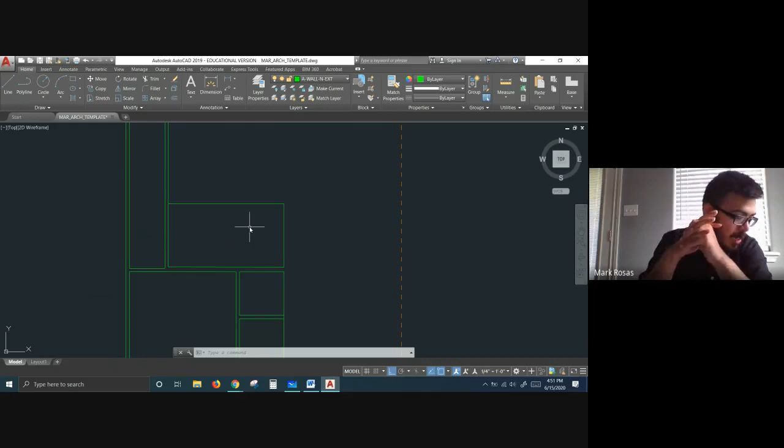Will you accept 3 feet for the hallways, or would you prefer 4? I would prefer 4, to be honest, but like I said, the smallest I would allow you to go is 3, and that gets really tight, especially when you're trying to move furniture and stuff like that. Usually you want to stick to 3.5 to 4 feet.

All right, so I put a plumbing wall right here. You can see where it's thin and then it gets thicker. I'm gonna put another one on this side only because I don't know how I'm gonna lay out my restroom yet. This is gonna be a Jack and Jill restroom where they're both gonna be able to access it from their bedrooms.

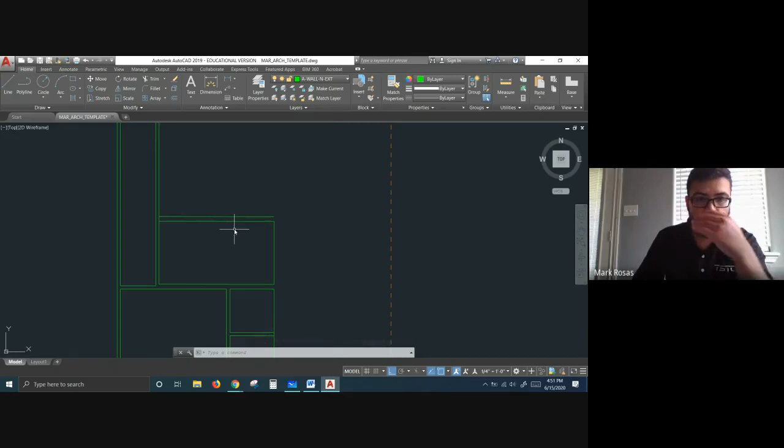Oh, I messed up, never mind. I'm gonna change that. I'm not gonna do Jack and Jill restroom. I did this for a reason.

So instead, what I'm gonna do is a 4.5 right here. I'm gonna offset 12 feet this way. 12 feet, not 12 inches.

And this was supposed to be 10. What happened here? You made that 12, you made it bigger. Yeah, no, I made this one 12, but this wall was coming up short. Okay, there it is.

So yeah, so I did a 12 by 10. This room is gonna be slightly bigger only because I'm gonna try and line it up with this back piece, that way we don't have that odd notch. So this room will be slightly bigger, it'll be 1 foot bigger so the kids can fight over it. We know we all like that.

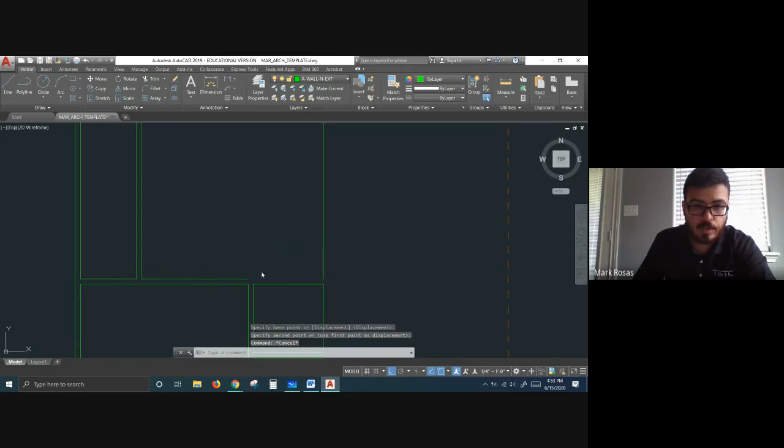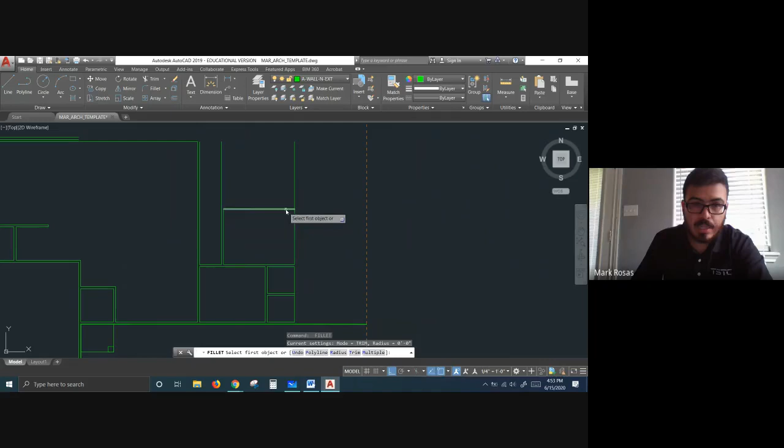So I did 13 this way, and then I'm gonna do 10. All right, so we have a 12 by 10 and a 12 by 13 bedroom. I'm gonna offset 4.5.

And I can keep building and building and building and building. All right, I'm already gonna hit 5 o'clock, but you guys get the point of this, right?

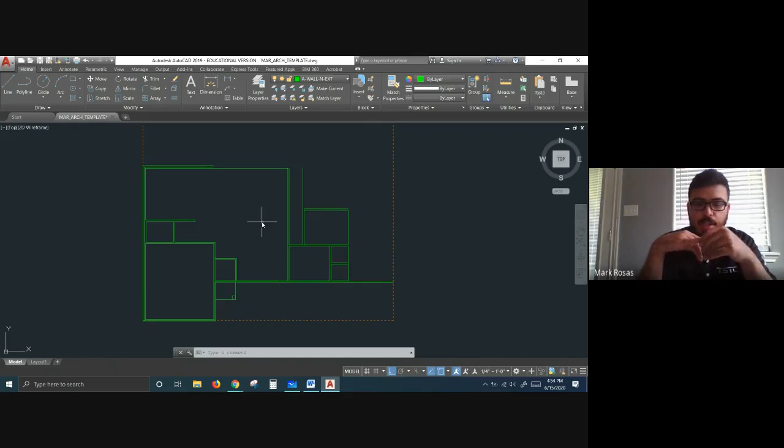Yeah, and I'm into the first semester, in a sense. Yeah, it's the same thing that happened that you guys did last semester, except now you're doing your own creations. A lot of times when you're looking at someone else's drawing and redrawing it, it's a lot easier because you already know where you're going. It's a lot more difficult when you're starting from scratch. That's why I had you guys do the bubble sketches, so that gives you a rough idea of what you wanted. Once again, those bubble sketches can always be modified, changed, or totally scrapped and start from new. But it was just to get your creative juices kind of flowing.

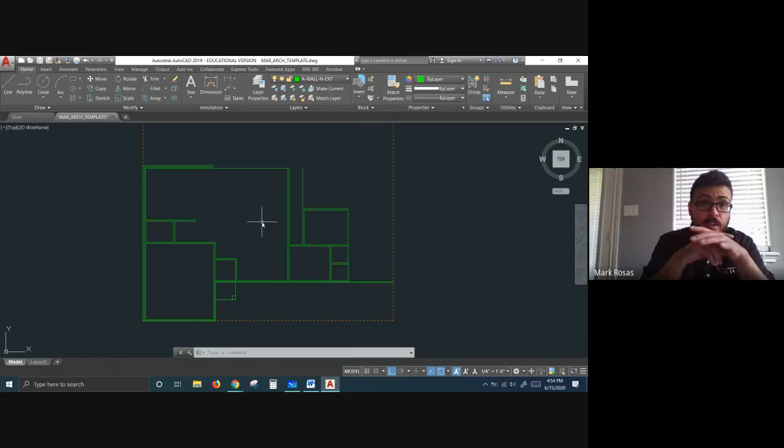Now that you guys are going to be starting your floor plan, this plan, I'm giving you guys 2 weeks to complete. Don't think you're going to have 2 weeks for just the walls. This week, I recommend getting the walls up as fast as possible. Next week, I'll be showing you guys how to do something else. Well, on Tuesday, I'm gonna be going over that lecture over the PowerPoint, but the following week I'll be going over the some extra things that you need to start adding in, like cabinetry and stuff like that. We'll start planning out the floor. But this is gonna be a little 2-week project, so your due date for this, everything complete, will be on the 28th.

All right, now once again, don't procrastinate and be like, oh, I got 2 weeks to do that. Well, no, you don't technically, because next week I'm still going to be giving you something to add into it. I won't ask for anything due, so nothing is due on Sunday, at least on the 21st. But I do expect you to be at least a good ways into your plan. All right, does that sound good? So no due date on the 21st, but at least a decent amount of your floor plan put together already, if not all of it put together.